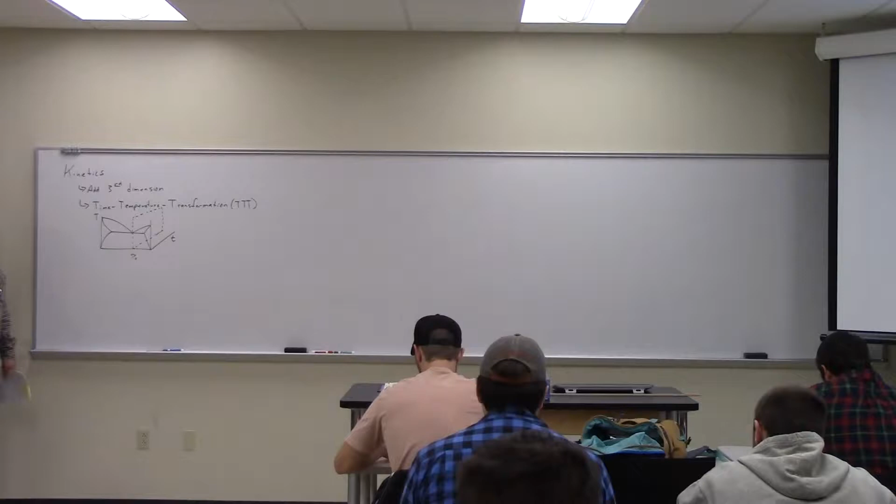Okay, you with me? So you take a time and a temperature to get a transformation at a specific composition. So what I'm going to do is I'm essentially going to take a slice like that through the diagram and show what happens as a function of time. Does that make sense? In reality, what I'm actually going to do, if you want to apply time, is actually in this direction, because the front face that we've been looking at is the infinite time position. So time really—t equals 0 is back here. You follow me?

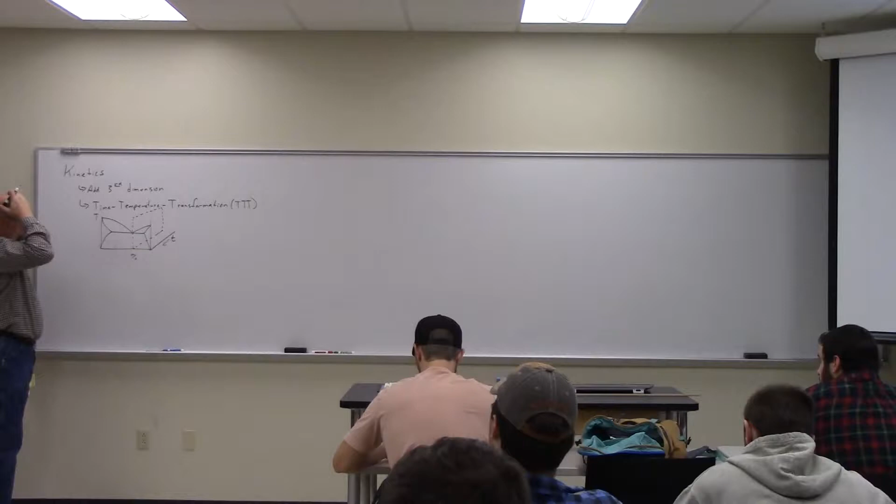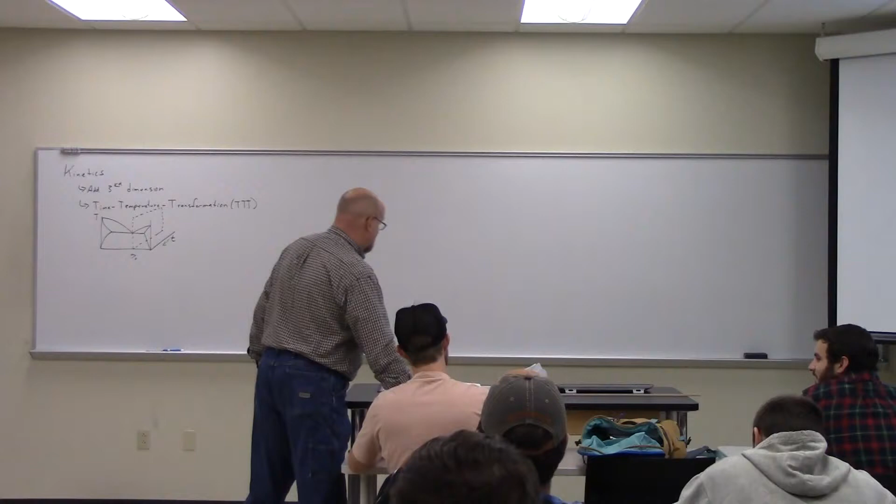Okay, so—God, I think I smell that. It smells like pizza dough or something. I don't know. You're not supposed to test chemicals by smelling them—interesting. Come on, all right. You're not supposed to test chemicals by smelling them, guys. Oh, no, that was something else. Oh, gosh. Oh, apparently I smell myself. I'm sorry, apparently you smell like pizza dough.

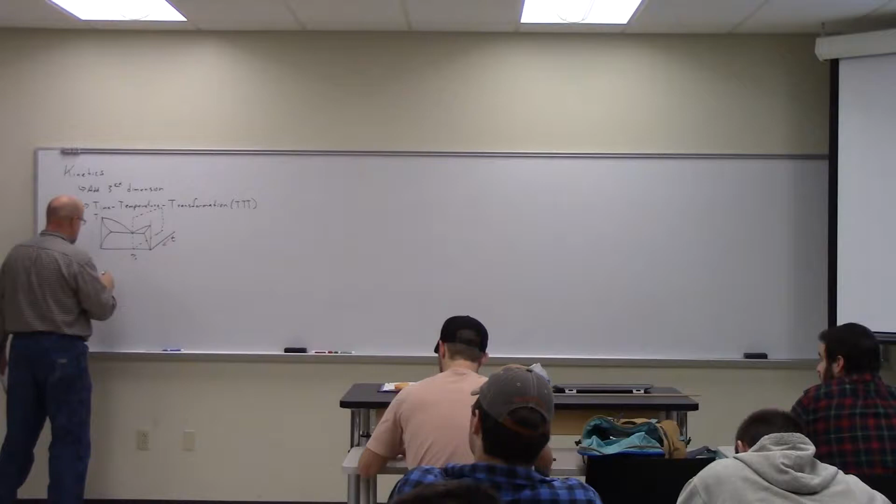Okay, so let's take as an example—and this is the reason we're using this example, because it's probably one of the most important TTT diagrams. I'll do it over here. We're going to take the iron-carbon phase diagram, or actually the Fe3C, the iron-cementite phase diagram, and we're going to use a eutectoid composition.

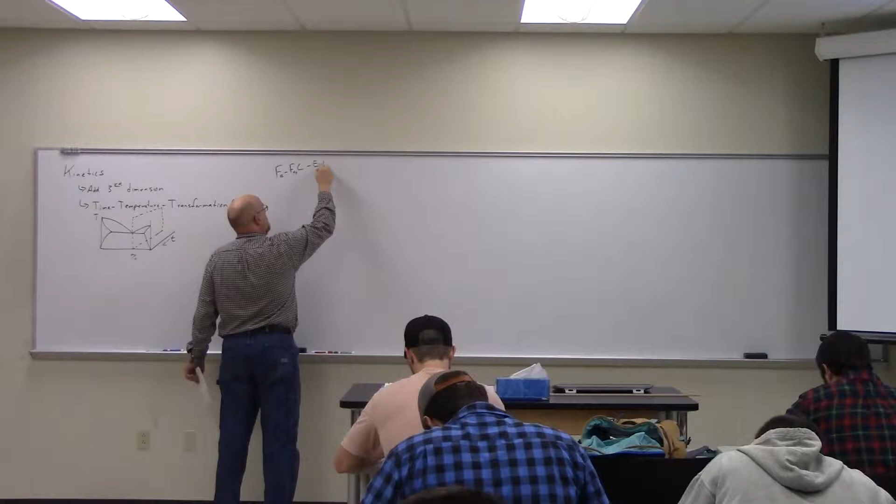Anybody remember what the composition is, what weight percent carbon I'm doing this for? 0.77. Do you have the book in front of you? Did you read that from the book? Yes. Okay, just want to know whether to be impressed or not. I appreciate your honesty.

We're going to take, if you remember, I'm not going to draw the whole thing, but we have the alpha phase over here. This is lead tin? No, that's another one, because iron's got the delta. Okay, so we have alpha here, we have gamma here, and this is 0.77.

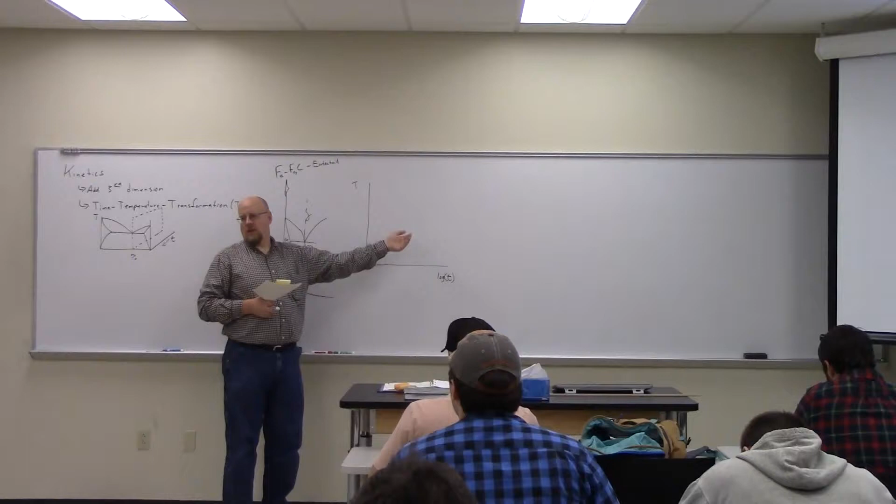So we're taking a slice through that piece, a slice through that thing. And what we end up with is the TTT diagram looks like this. What is it slicing? Through the eutectoid, yes. Temperature versus time, and this is actually versus log time, because we want to make sure we can carry things out to infinity. The best way to do that is to put it on a log scale so we can bring infinity in close.

This temperature here is the eutectoid temperature. So above the eutectoid temperature, it's all gamma. Now, TTT diagrams assume that we are moving down and to the right. Time is increasing and we are cooling. They do not apply for going upward, only for going downward. Is there one that applies to going upward? No. You don't really care because once we heat it, it's just gamma.

So what we get is we get something that looks like this. Whoa, it's a road, it's the highway. This is the 1%. Highway to life, I walk alone. Shut up. Came to a wood, two roads. Those are the 1%, 50%, and 100% transformation lines.

Because below the eutectoid temperature, it's supposed to be all alpha and Fe3C. What's the structure that forms when it goes through here? What does it look like, microstructure? It's like lamella, or lamellar. It's a lamellar structure, right, most commonly that's what forms. So it's going to form a lamellar structure, but if you go fast enough, it stays as gamma.

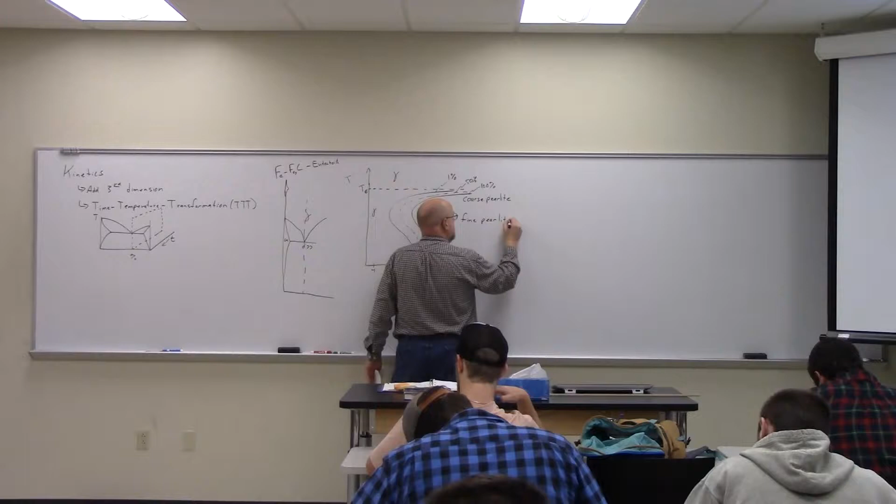So coarse pearlite, TE is the eutectoid temperature. Coarse pearlite just means that it's a lamellar structure. Pearlite is specifically reserved for steel, for the lamellar structure of steel. So coarse pearlite is that you're cooling it slow enough that it forms thick layers.

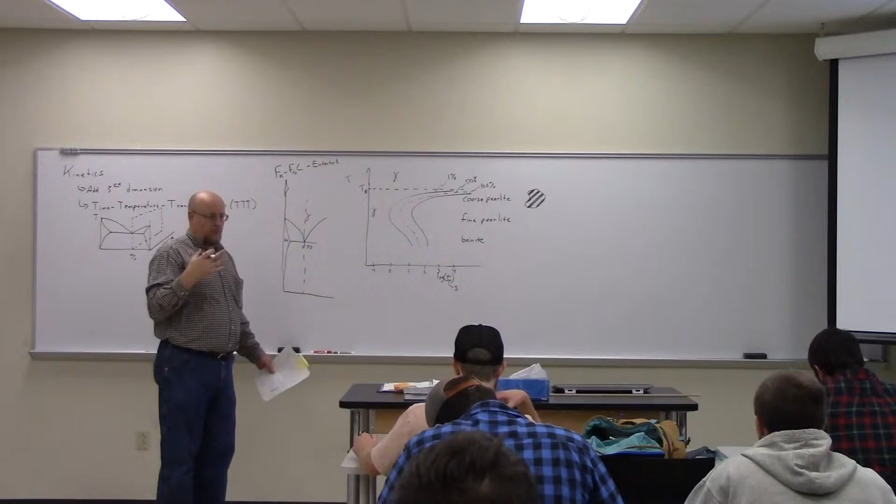It is not nicely laid out in parallel paths. If you go fast enough, it can't form these nice uniform structures, and so it forms these randomly oriented layers.

So is bainite based on the speed at which you cool it, or the temperature at which you're starting? Because that's how you have them written there, like they are where you get them.

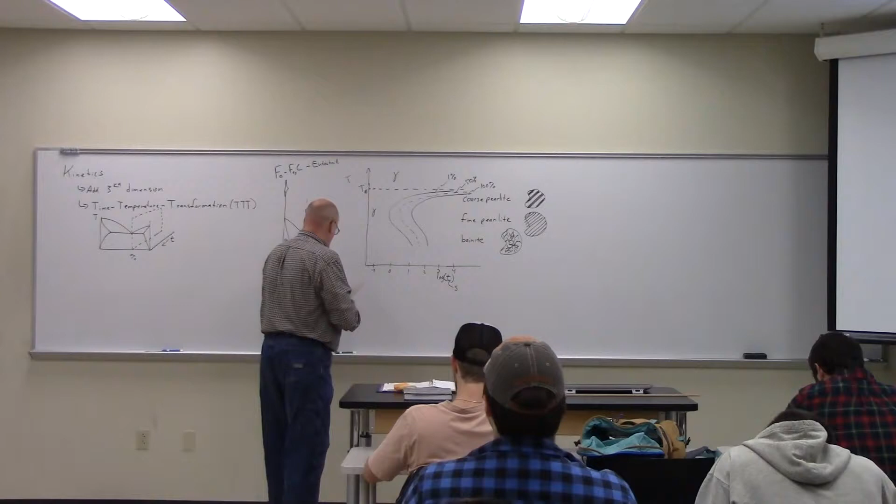So the way I use this is that I quench things. I start out with stuff up here. It doesn't matter, T equals 0, therefore infinitely far to the left, right? Because the log of 0 is infinitely negative.

When I cross this boundary, the clock starts when I cross this boundary. So if I could come down and do this, and then cool it down to room temperature, that says that at this point in time, at 1 second, I begin forming fine pearlite, and over here at about 10 seconds I finish forming fine pearlite. I go from 0% transformation to 100% transformation.

Where's the 10 seconds? Right there, right, 10 to the 1 is 10. Okay, I didn't see that, it's kind of a long scale. So do you understand?

Do you follow that? So there's not necessarily a set path that you take through this. You use whatever you need to get there. So you can structure the thing the way you want to, to your ability to follow that path. Some paths might not be possible.

Where are each of those pearlite and bainite categories? Like where do they correspond? So right now it's fine pearlite. If I'd cooled it down to this temperature and left it for 1,000 seconds, I would form coarse pearlite.

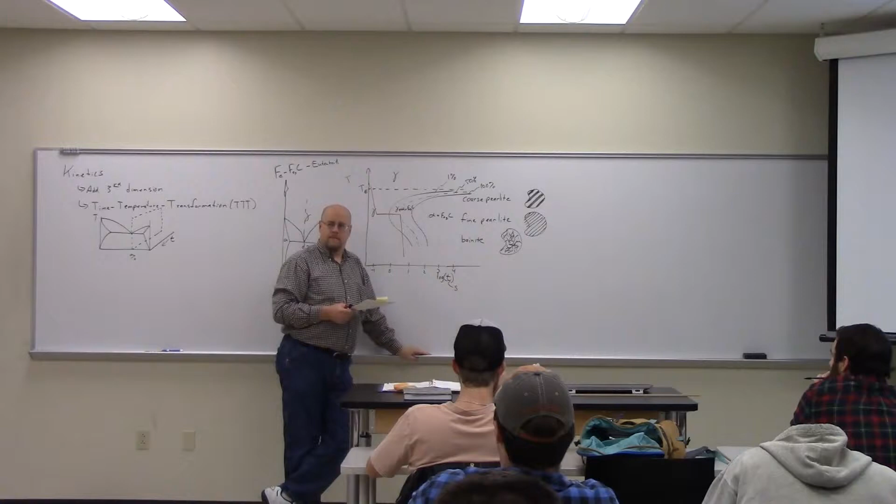But there's no clear delineation between where one starts and the other ends? No, because this is going to be a gradation, right? Just thinner and thinner as we get down here. And as it gets thinner and thinner, eventually it gets to the point where they're not continuous anymore and they're breaking up into random directions.

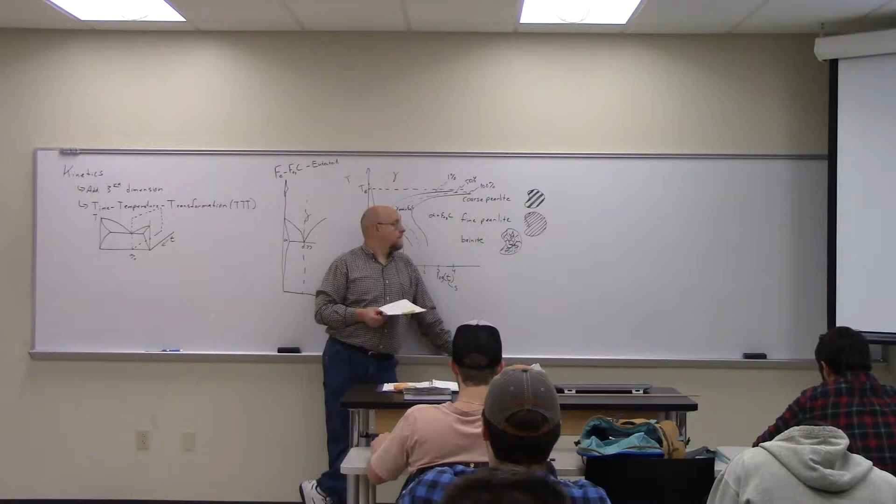Okay, so what are alpha and gamma? Like, I thought we were talking about... Alpha iron, right here — alpha iron and gamma iron. Okay, so is alpha not just on the left side there, but also in...

Right, but this region down here is a mixture — it's a two-phase mixture of alpha plus Fe3C, which is the right-hand side. Just like this section over here is a mixture of, you know, alpha tin, or alpha lead rather, and this was beta tin, and everything in here is a mixture of alpha plus beta, a physical mixture.

Right, but it also changes. Even if you stay at the eutectoid point, as you go in you get into alpha and gamma and combinations and stuff — is that what you're saying? No, I'm saying this is the infinite point.

So you notice if this goes all the way out to infinity, these lines all approach the eutectoid. Above the eutectoid temperature it's gamma. Below the eutectoid temperature it's alpha plus Fe3C, or some kind of pearlite, coarse pearlite. At infinity, time equals infinity, so I'm doing slow cooling — I have a single transition that happens when I cross that temperature.

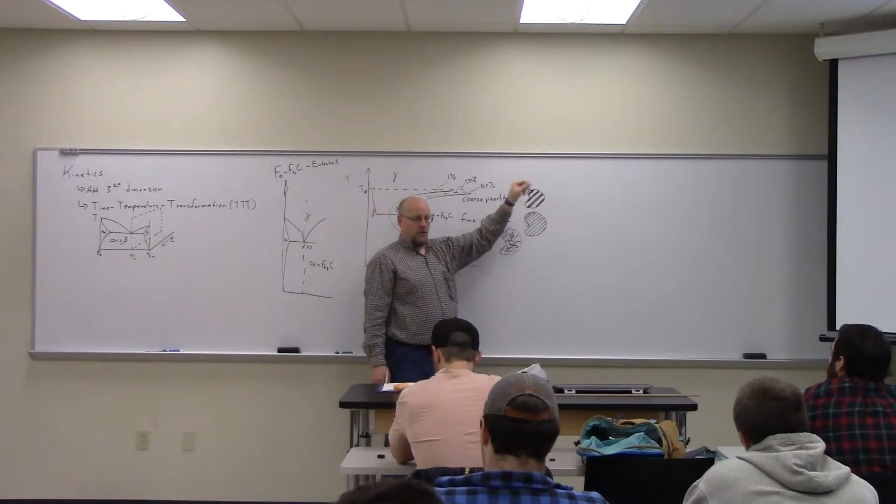Does that make sense to everybody? Because all of these asymptotically approach the eutectoid temperature. This is only what happens in the very rapid cooling section, which is far away in time from this. I'm basically looking at this plane from the left-hand side — T equals 0 on the far side, this is T equals infinity.

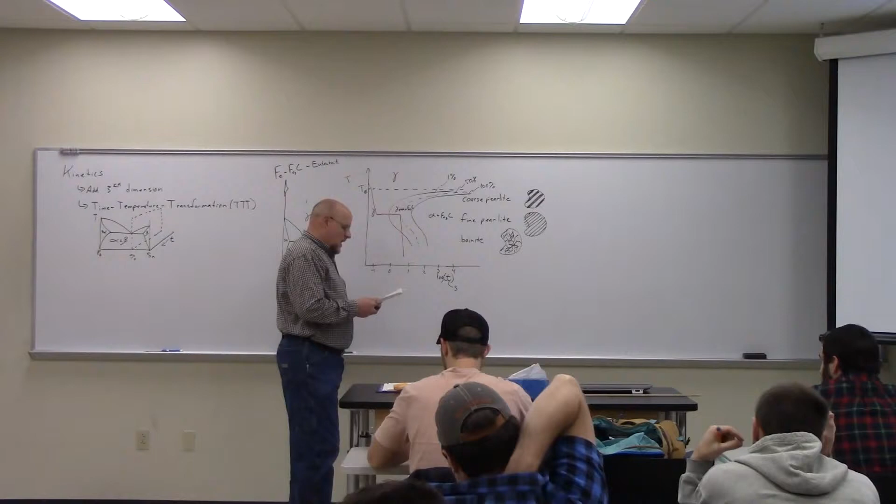This assumes the path I've drawn here has an instantaneous quench down to this temperature, then I leave it at that temperature for this period of time, then instantaneously quench it down. That's how the diagram is derived. It assumes I'm moving only downward and to the right—no angles, no curvy lines.

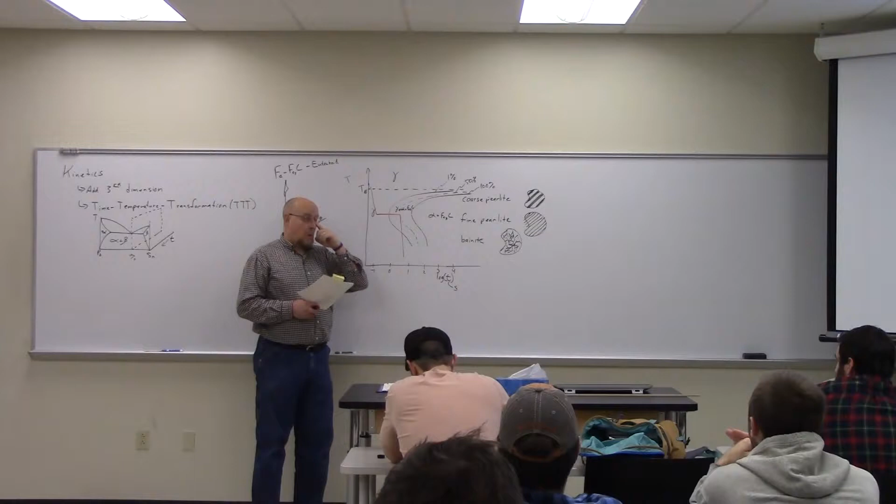Okay, but technically they are curved lines, because we're talking a log scale, right? The red lines, I mean a log scale. Right, but instantaneous is still instantaneous, so downward and to the right still works even on the log scale.

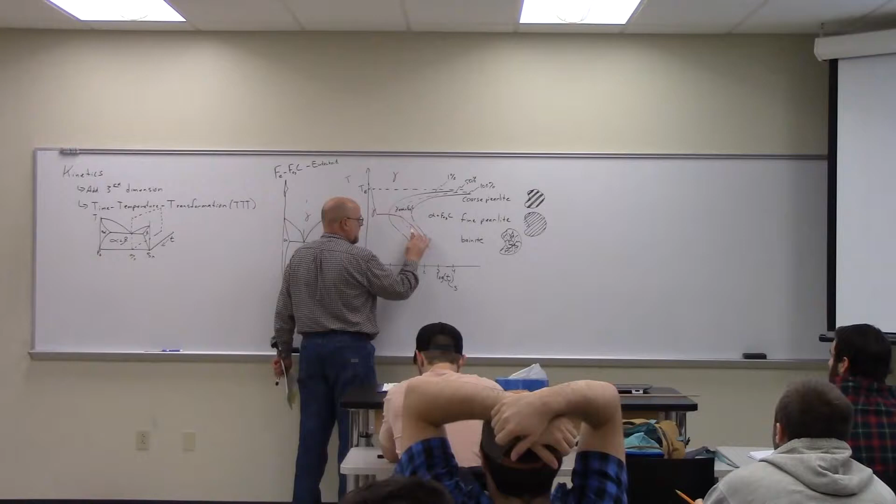There's no straight lines. So we can make the approximation that even if my curve actually looks something like this, we'd essentially approximate that, well, we got 50% fine pearlite. If we went like this, I'd say we have 50% fine pearlite, and maybe you have to estimate, right?

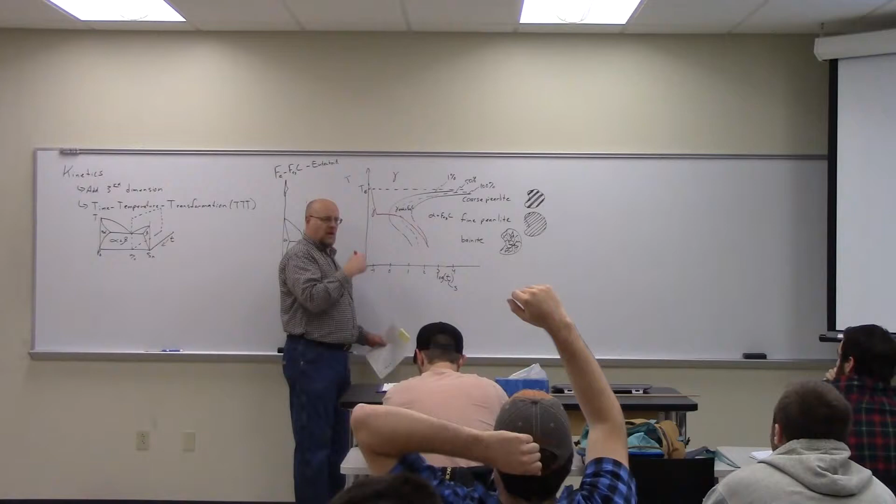You don't really have a good way of knowing how much of it is bainite versus how much of it is pearlite. So that's why you want to go down and across, so that you can actually understand what's happening to your material.

Does that percentage thing come all the way down to the bottom, the x-axis? I told you, as I just said a minute ago, Josiah asked the same question. I'll get to the bottom in a minute. Okay, silly goose, okay.

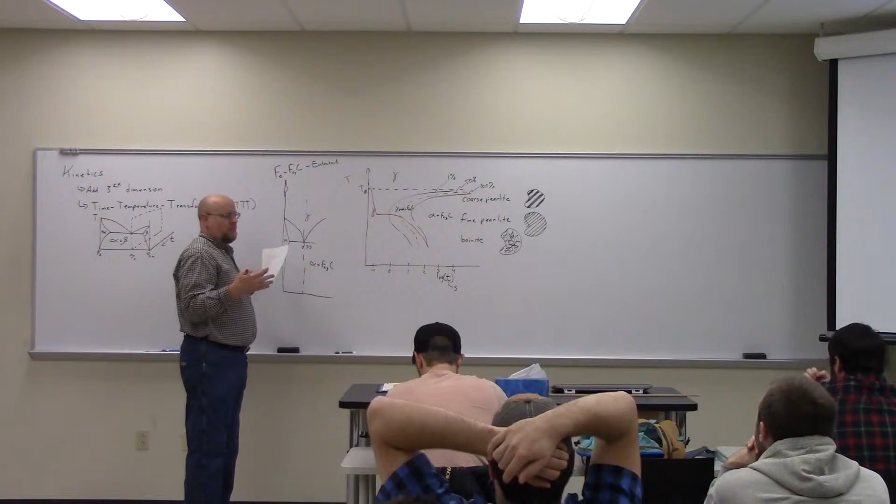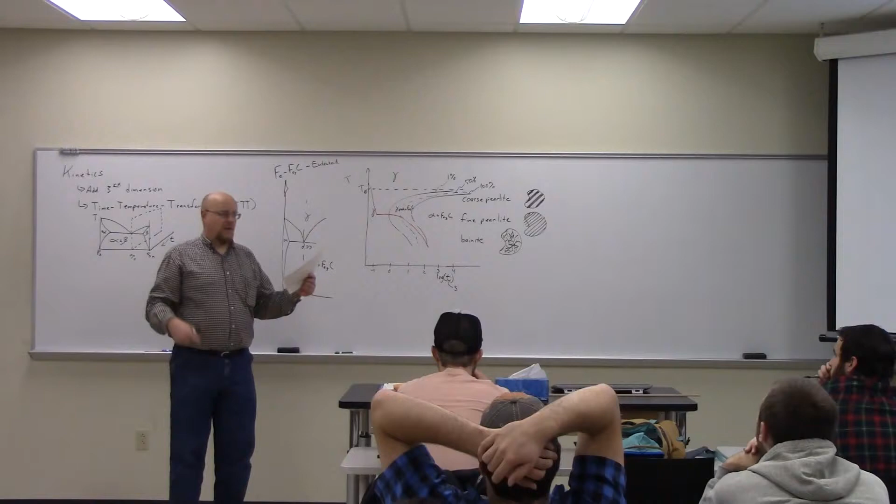Now the thing is, all of these phase transformations are based on a diffusion process. You have to diffuse a second phase out of a first phase. So even when the composition stays the same, I have to diffuse an alpha out of a gamma. So alpha will form at the grain boundaries.

Remember we talked about this with the microstructure problems before—it starts forming at the grain boundaries, the trifold intersections of the grain boundaries. So if I take some gamma that has grain boundaries and then cool it, the alpha will begin to form at the intersections of the grain boundaries, and the alpha crystals will grow while the gamma crystals shrink. That's the way the process works.

So it's a diffusion-driven process, yes? Generically, when do we start to see grains starting to form? Around what temperature? Well, as soon as it's, from a liquid, as soon as it solidifies, you start seeing grains form.

So when the film starts to form on top, if it's cooling, is that just at room temperature? Right, so it's cooling to room temperature, grains are forming on top.

So if you ever lick your ice cream spoon and then put it back on your ice cream, you'll actually see ice crystals begin to form on your ice cream spoon. It kind of forms dendritically, like little trees—a long stem, and then a stem coming off here and a stem coming off here. You ever do that? It's funny when you say it that way, but yeah, I get it. So that's when, as soon as it starts to solidify, you see the crystals form.

All right, so these are primarily driven by diffusion. We've got to diffuse the atoms that are trapped in the gamma out to the edges in order for them to transform into alpha. It's a diffusion-driven process.

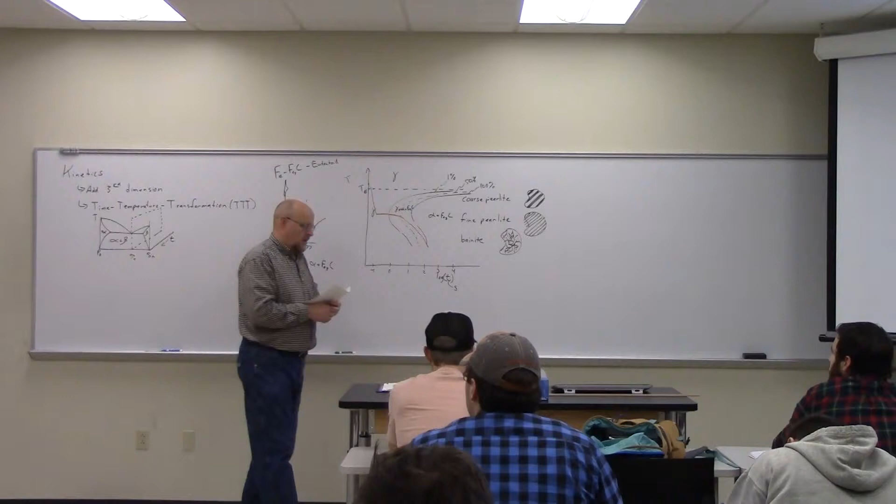So there are two steps. There's nucleation—that is, we have to start the grain somewhere, like I was talking about with the boiling water last time. You have to have some place for the reaction to start. And then you have growth—that is, once you have a seed, you start building on that seed.

So let's look at nucleation first. We have local diffusion that governs all these atoms having to come together, diffuse through whatever's there to begin with, to nucleate a particle. So they have to coalesce. As I said, things like high energy regions, like in the grain boundaries or on the surface—as Colin pointed out, it's going to happen on the surface. You have higher energy on the surface. So there are two driving factors.

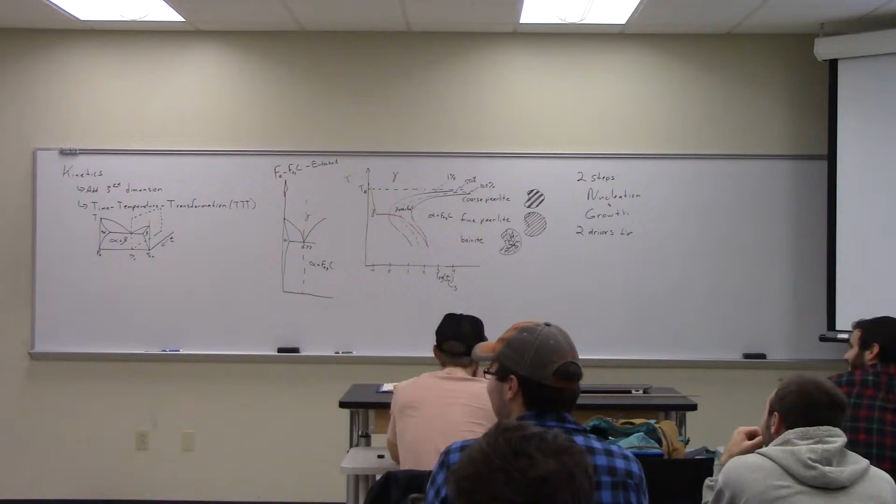Are you sure those are drivers and not risks?

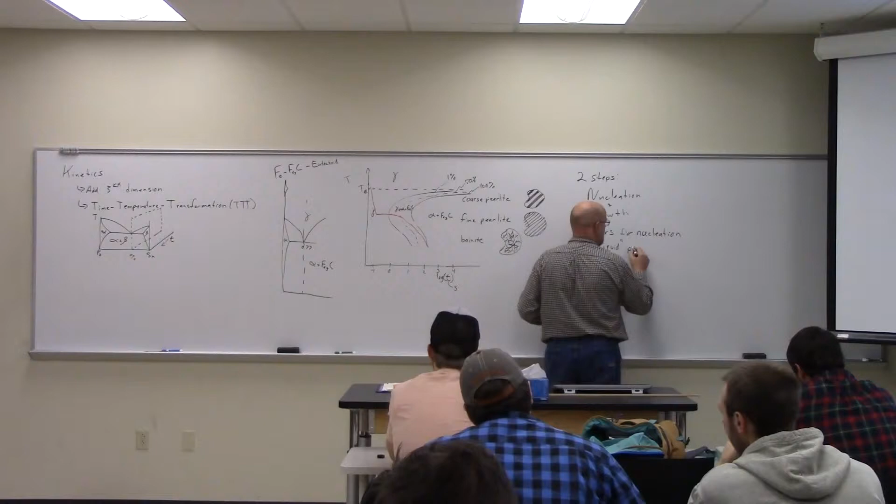Okay, two drivers for nucleation. The first is what I'll call the liquid phase instability, even though it's not necessarily a liquid for the eutectoid. Right, just like I was talking about with the boiling water. You superheat the water, it gets above 100 degrees C, it's unstable. It doesn't want to be water, it wants to be water vapor. The higher the temperature you go, the more instability you get.

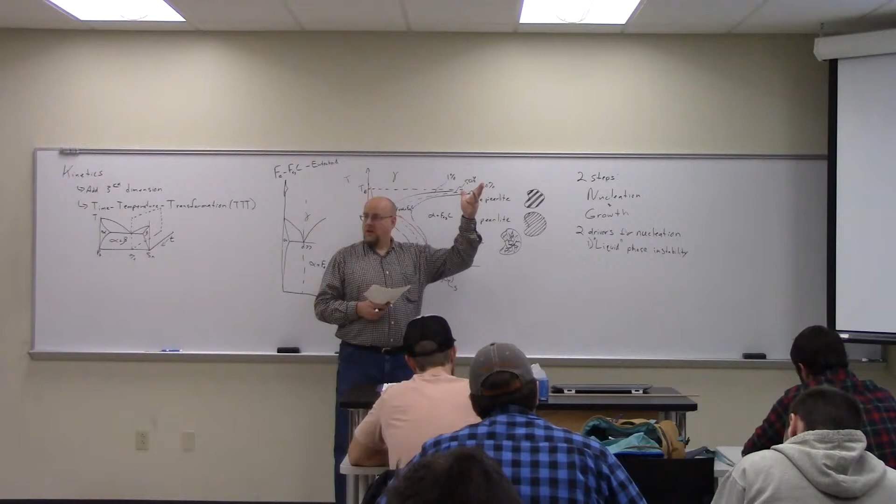Right? The second driver is diffusion, to form nuclei.

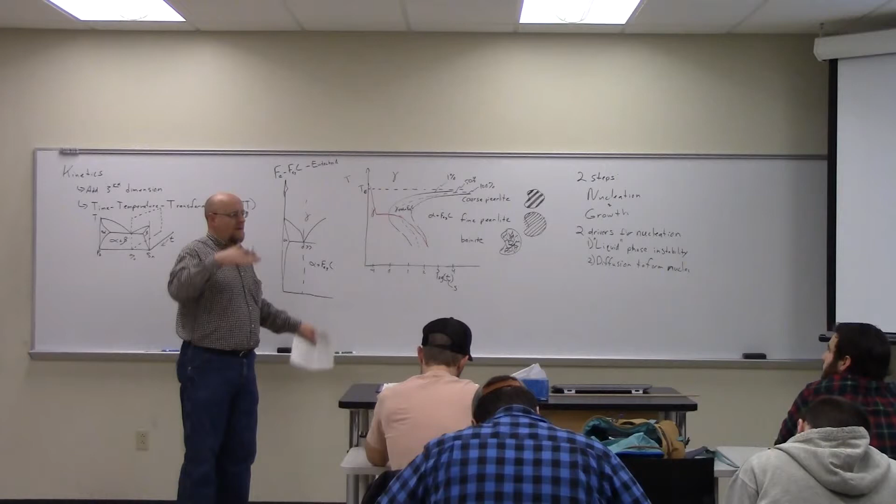So in this case, liquid phase instability is bigger the colder you get. The colder the liquid becomes, or in this case it could be the gamma, right? But it's gamma phase instability. The colder it gets, the more unstable that material is. Does that make sense?

So if I were to plot it as a function of temperature, and plot the rate at which it happens, seconds to the -1, at high temperature, let's put T sub E in here, for instance. At the eutectoid temperature, there's no instability. At T sub E, there's zero instability, so there's zero rate.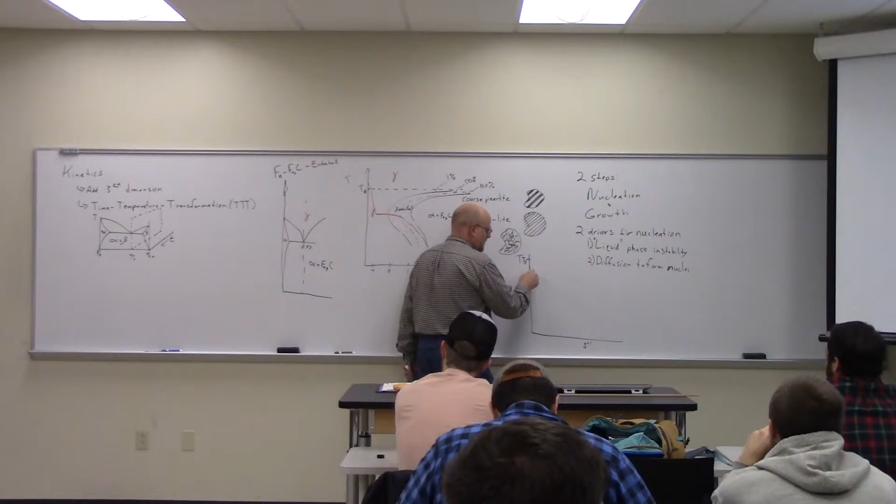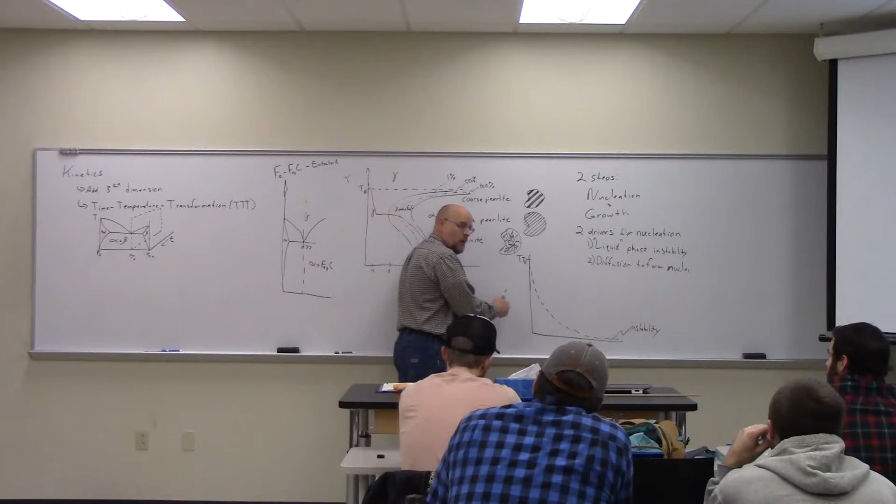But as I get colder and colder, the instability increases. So this is instability. I get more and more instability the colder the thing gets, the further it gets from the eutectoid. As I drop the temperature, I get more instability, therefore a higher rate, or higher likelihood, of the liquid phase wanting to transform into the solid phase, or the gamma phase wanting to transform into the alpha. The lower the temperature, the more unstable it is. Does that make sense?

Well, why aren't we plotting rate on the y and temperature on the x? Simplifying, temperature on the y and rate on the x? Deal with this: because over here we plot temperature on the y, so we're going to continue to plot temperature on the y.

Diffusion, on the other hand, does not occur very well at low temperatures, right? We've shown the Arrhenius plots. Remember talking about the Arrhenius relationships? The higher the temperature, the greater the diffusion rate. So diffusion does something like that.

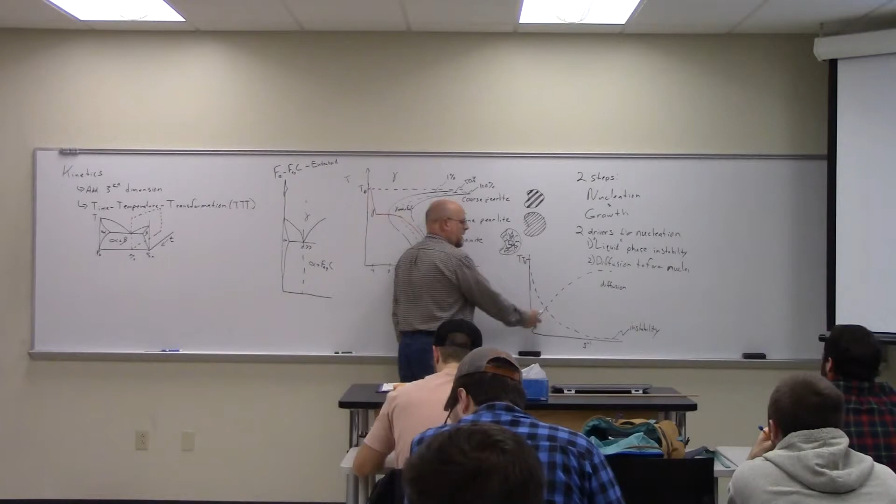So at very high temperatures, actually let me compress that a little bit so I can get this right. At very high temperatures I get lots of diffusion, but I have very little instability because it's very close to where it wants to be a liquid anyway, or wants to be a gamma anyway. At low temperatures it's very unstable, but I have very little diffusion to drive the process.

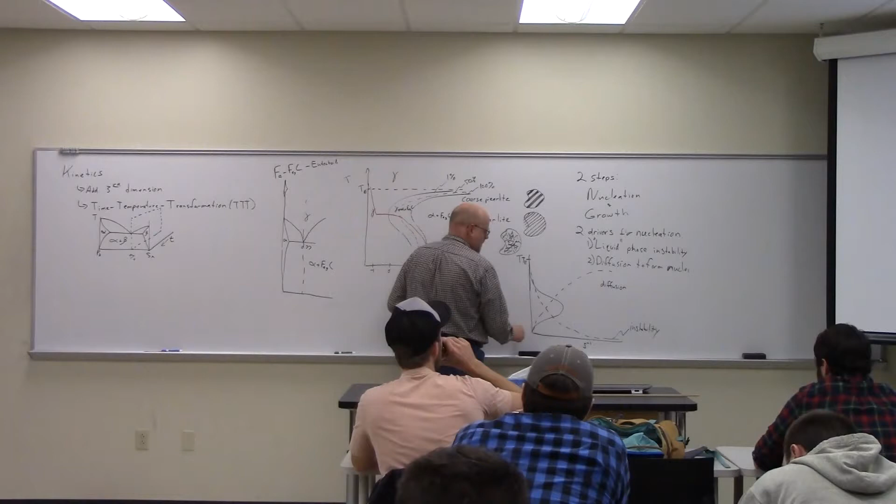So what I end up with is the product of these two, which is the nucleation rate, which looks something like this. N dot, the nucleation rate. Does that make sense? Yes? Okay. See, it's nice when the back row bobbles their heads, and I know I'm all right.

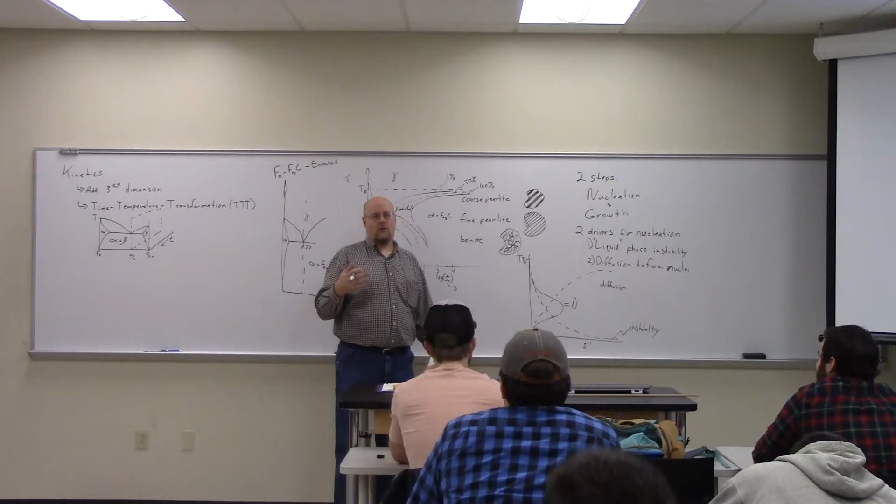Actually, you're more likely to doze off when you're sitting. Anyway, that's the nucleation rate. Now, that only covers nucleation. What about growth? What's going to drive growth? Temperature, yeah, but how? What kind of mechanism do you think growth is going to occur through?

Some sort of differential equation. Isn't that the common answer for all engineering problems? Is there a differential equation? Well, it turns out...

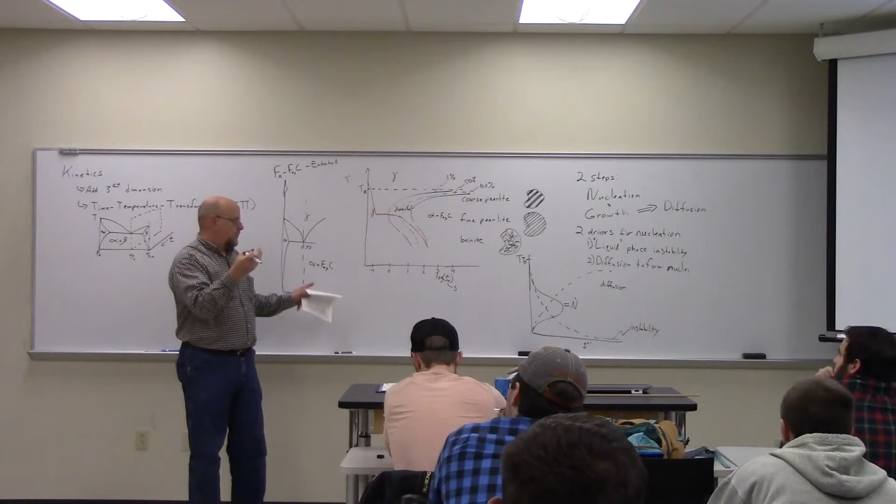Growth is really only diffusion. There's not an instability that drives growth. The only thing that drives growth, once I have a crystal, the only thing that stops it from growing, because it's the stable thing to be in that matrix, right? The alpha is the stable element. There's no instability driving alpha. Once I have an alpha, the only thing keeping me from getting more alpha is diffusing stuff to get there—diffusing other material to that surface so it can form more alpha. So it's just diffusion.

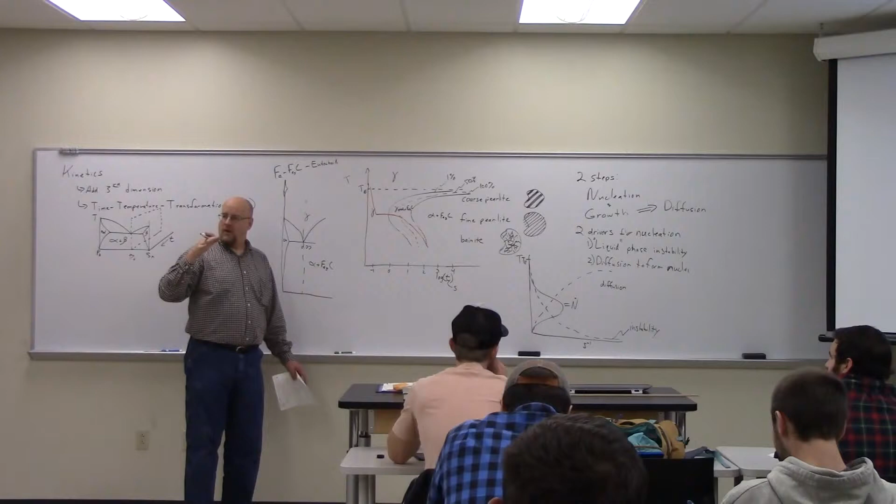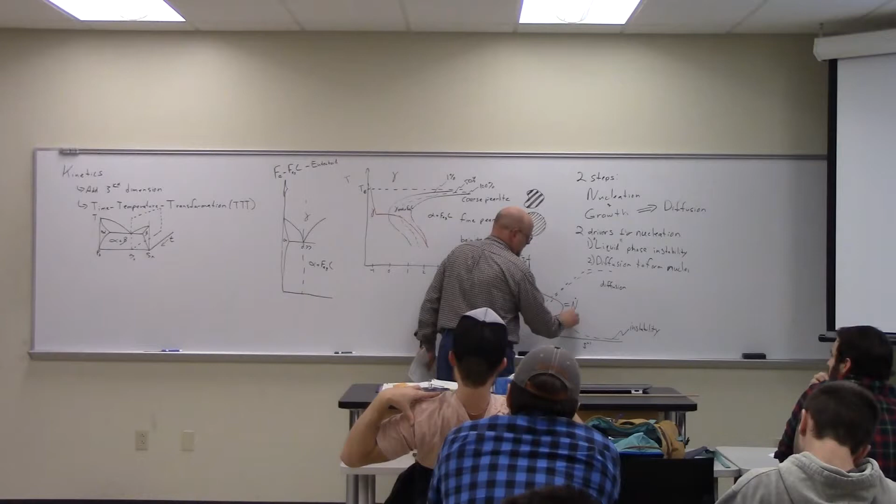So essentially I end up adding another diffusion curve to that other one—a different one, not the same diffusion curve. So what I end up with is a total thing that looks like this, something like that, where this is nucleation and growth rates. The overall transformation rate, right there in the red.

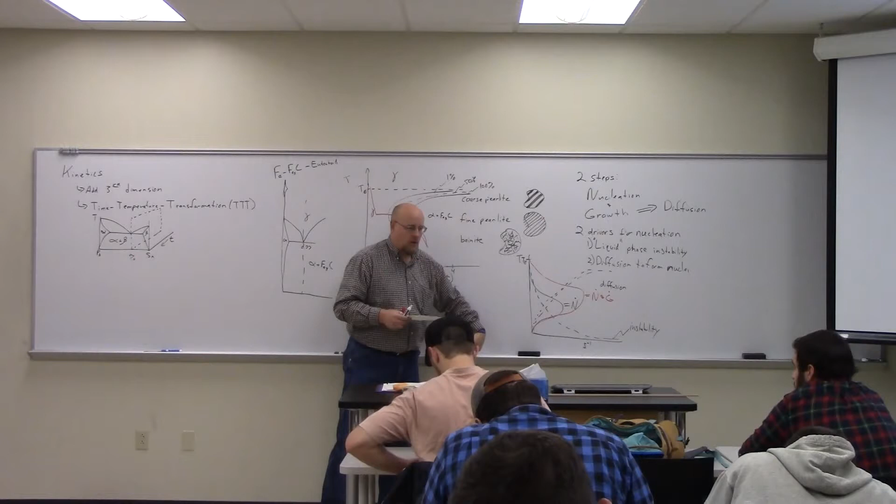But I don't really want to plot it as a function of rate. I want to plot it as a function of time. So I have to invert my horizontal axis. And when I invert my horizontal axis, those things become these things. So that hump right there, when I invert my axis to time, becomes this.

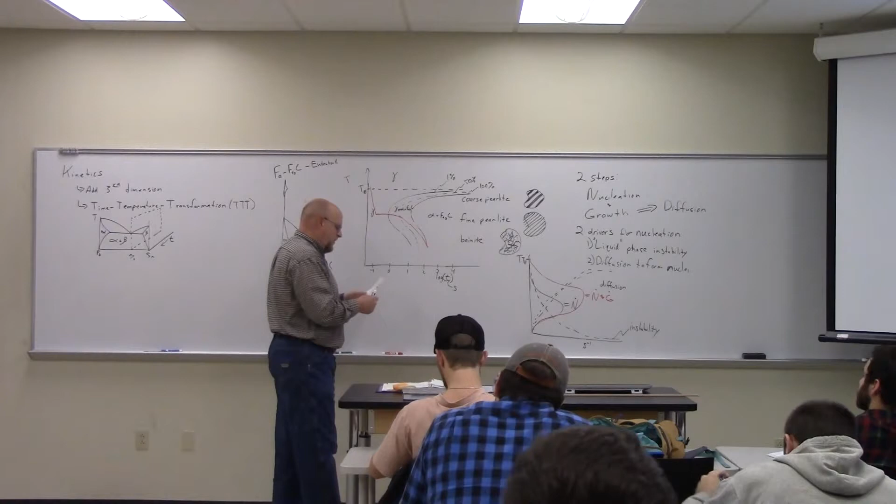Does that make sense? So it's still all driven by the nucleation, or primarily by the diffusion. Diffusion really governs, has the biggest impact. But there's still the fact that you have little instability at the top, and that little instability drives this out here. Okay, that's mostly diffusion-related behavior that acts like this. There are a few that are non-diffusion behaviors.

Anyway, so there are some non-diffusional phase transformations.

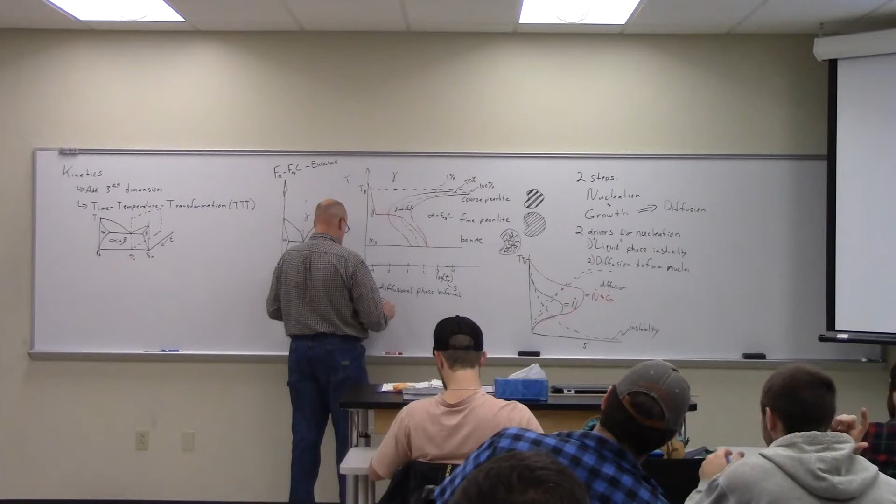The one we care about here is martensite. I think that's what MS is - martensite start. So we have the martensite start. It's a sudden reorientation of the crystals.

Basically, kind of like twinning. Remember twinning? There was like a ding, right? And you heard it because it was. So here's the same kind of idea.

We have these gamma crystals, and we slam them down cold enough, so cold that we create such tremendous instability that instead of having to diffuse atoms around to grow crystals of alpha and Fe3C, we spontaneously and suddenly get all of the atoms to rearrange themselves into a different crystal structure, which in this case for steel is martensite.

So what you get in martensite in steel is a body-centered tetragonal structure. So we're going from an FCC gamma to a body-centered tetragonal, BCT structure, in martensite.

So if you think back to it, FCC - is that BCT there? BCT, body-centered tetragonal. All right, so FCC, we've got an atom on every corner, an atom on every face. Everybody see that?

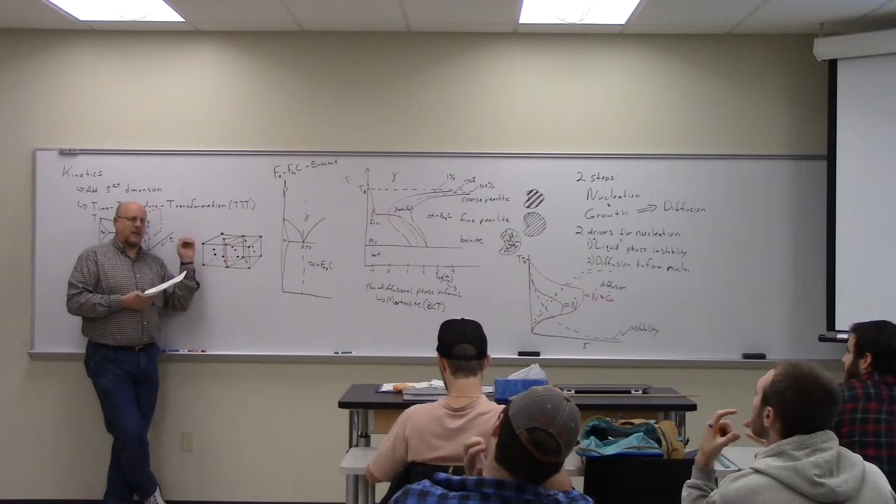How a body-centered tetragonal could come from this - so basically what that means is FCC is like a body-centered tetragonal, but with the special condition that the A of the body-centered tetragonal is equal to the C of the body-centered tetragonal divided by the square root of 2. If that C changes ever so slightly, it's no longer FCC, it's just body-centered tetragonal. Okay?

So that's how it can happen rapidly. There's just enough cooling pressure to get it to shrink, and then you have a new crystal structure.

So apparently mercury, when it's frozen, and you have a little bar of frozen mercury, if you bend it, it crackles like this. You also have to be really cold because - yeah, I don't think we'll be doing that. I saw it on YouTube. We could look it up. Or not, everything on YouTube is true.

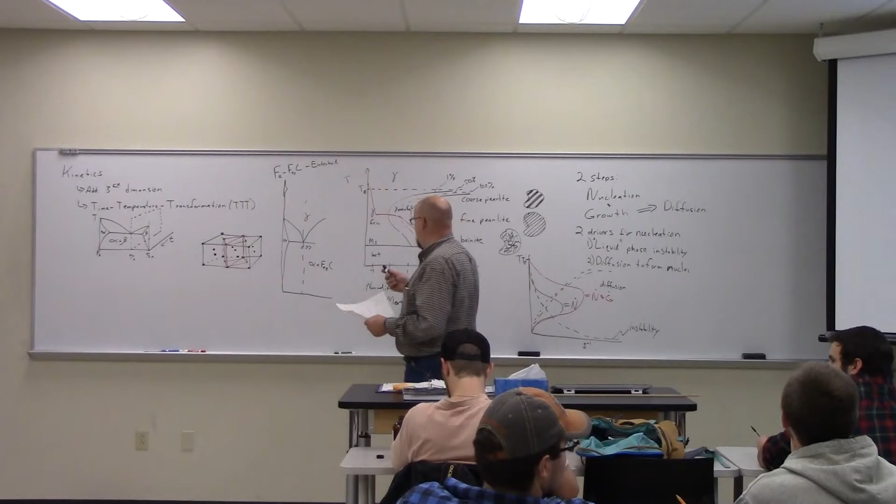Okay, so we end up with this martensite region. Now, martensite also goes through a series of transformations, just like the pearlite formation. So you have an MS, an M50, which is 50% transformation, an M90, and then, if you go far enough, an M final. But this one is minus 46 degrees C.

You go 46 below to get a completely transformed martensite. So it's not likely to happen. The start is 215 degrees C, this is 160, that's 130 degrees C, so still above the boiling point of water. You get 90% above the boiling point of water. The last 10% requires you to go from 130 down to minus 46.

So basically, we're going to be dealing with things in the M90 state. We're working with this material in like the M90 state.

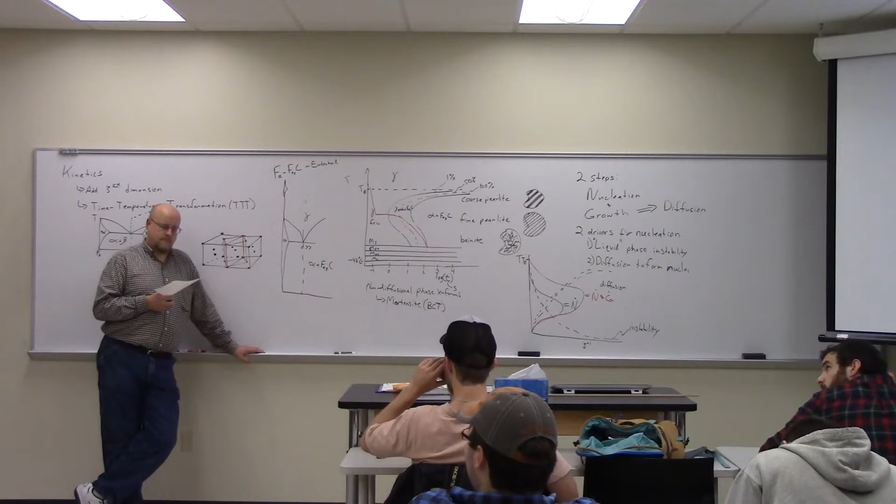Yes, at best, if you have martensite transformation, you're going to be working with something that's 90 to 95% martensite. However, what's really cool is once you get down into here, the gamma is locked in. You don't get the gamma changing - if I get down to here and let it go for a long time, the gamma doesn't change to bainite or anything. The gamma is locked in as gamma.

So once I get down into here, I don't have to worry about the time anymore. I just got to get myself down into there so that I can lock it, get some martensite to form to lock in the rest of the austenite. And then I can gradually cool it to get the rest of the transformation to occur.

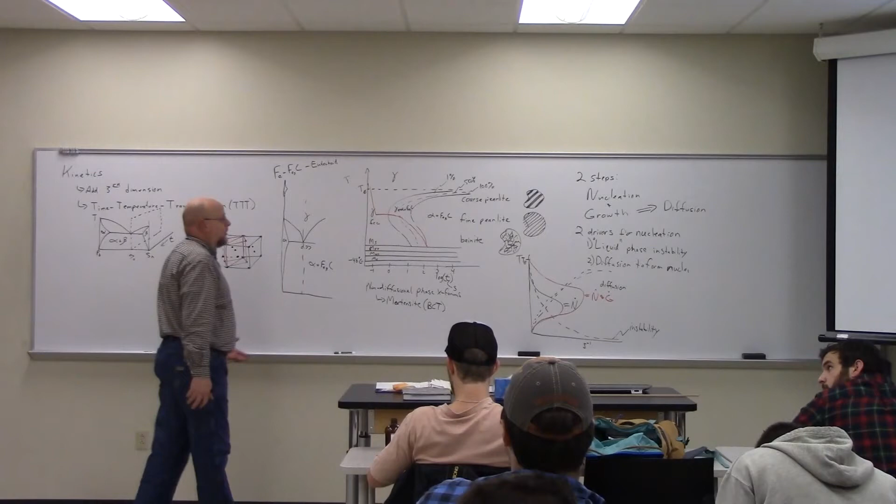So really all that we need to know - I'm just trying to figure out where this graph really comes into play in life. We want to know when we quench something, is it coarse pearlite, what's it quenching to? We want to know what kind of microstructure we have. Because it turns out, the further I go down this list, the harder the material is. It's going to be a lot easier for dislocation to propagate through a big open space like this than to propagate through this.

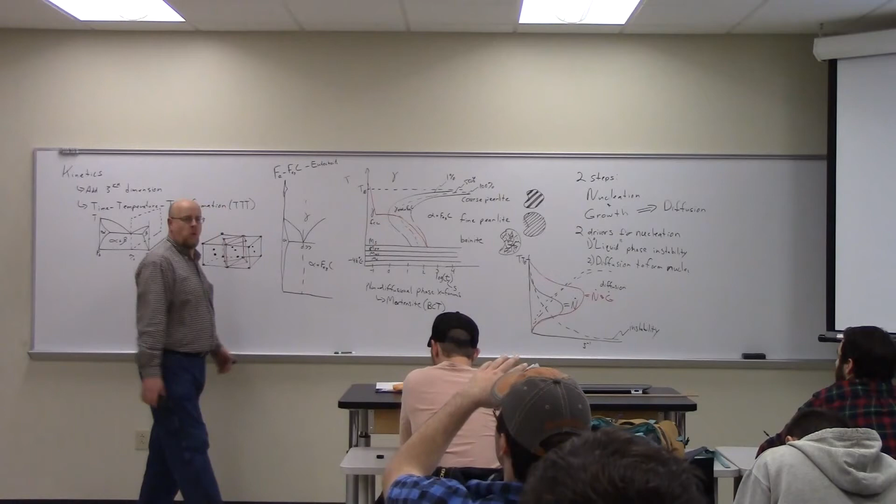So the coarse pearlite - we get over the coarse pearlite and then we just let it slowly cool after that, it's going to be fairly soft. Pearlite, right? There's no driving force to form anything else because it's perfectly at equilibrium with alpha and Fe3C. No, it won't become martensite.

Once it's formed alpha plus Fe3C, there's no more martensitic transformation. Martensitic transformation can only go from gamma to martensite, because alpha is a BCC material. It cannot go from alpha or Fe3C to martensite - those lines really shouldn't go past that. No, it does, because this only covers down and to the right.

Now, I've already gone 100% transformation - once I've gone to that point, I'm done. Once I've crossed the 100% line, I'm done. So you can't go down to the right and then down again. I can, but it's not going to change anything. Once I cross that 100% line, I'm done.

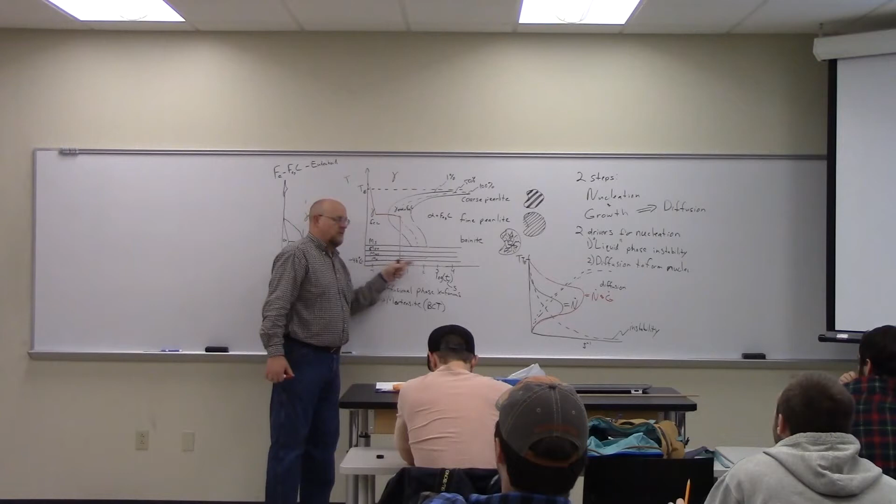If I went down, did this, and then went down from here, and then went over, then I would have something that's 50% fine pearlite and 50% martensite. Even if I went to the 90% line - once you pass that 100% line, you're done. Once you pass the 50% line, you're done with that 50%, right? Does that make sense?

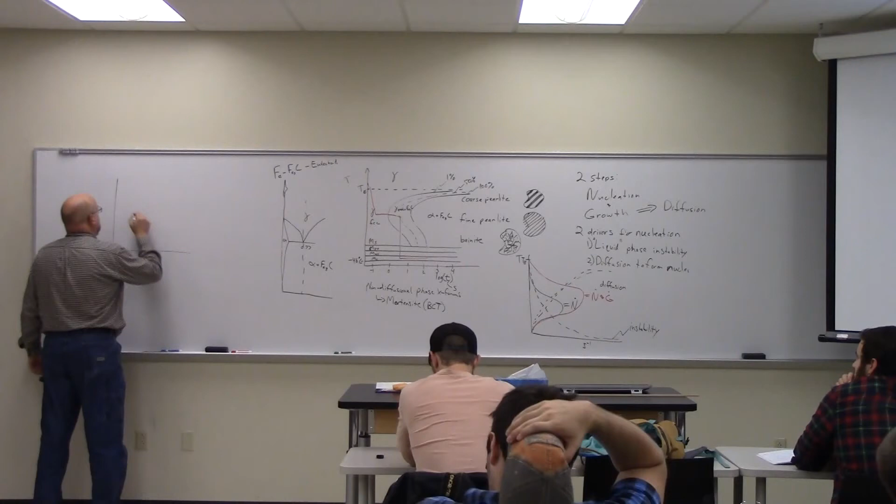Ish, okay. And this is true for the eutectoid composition, but you can also do a similar thing for a hyper or hypo-eutectoid. So this is what the eutectoid composition would look like. But if it's hyper or hypo-eutectoid, depending on where I am...

So if I'm coming down here instead, this is T, call it T sub S - that would be T sub S. There's a similar knee in the curve, even for a hypo or hyper-eutectoid. So here I still have gamma, here I have gamma plus alpha, here I have gamma plus alpha plus Fe3C, here I have just alpha plus Fe3C.

That make sense to everybody? And as we go into that gamma plus alpha section, it would be a different concentration of gamma plus alpha, getting more and more alpha as we go that way? No, the amount of alpha - this is just a percent transformation. And generally we only draw the top, where you start the transformation. So as I go across here to the right, I'm converting more of my gamma to alpha, but I'm never going to get any more alpha than I'm supposed to have in my system.

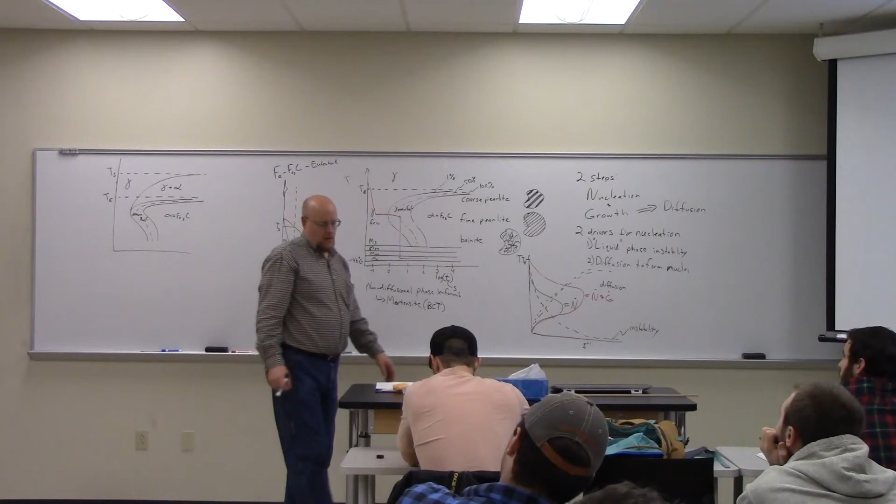Yeah, let's do this one. No, let's not do that one. We'll do that one next. Let's do this one. You can give us a gift. No. Okay, you guys want to figure that out on your own? No, that's true. Well then.

All right, so even though the earlier section we talked about this thing talks about crystal nucleation, as I said, it also applies to solid state transformation. Right, so gamma to alpha. So here we have equation 10.1. I've written out equation 10.1 in the slide.

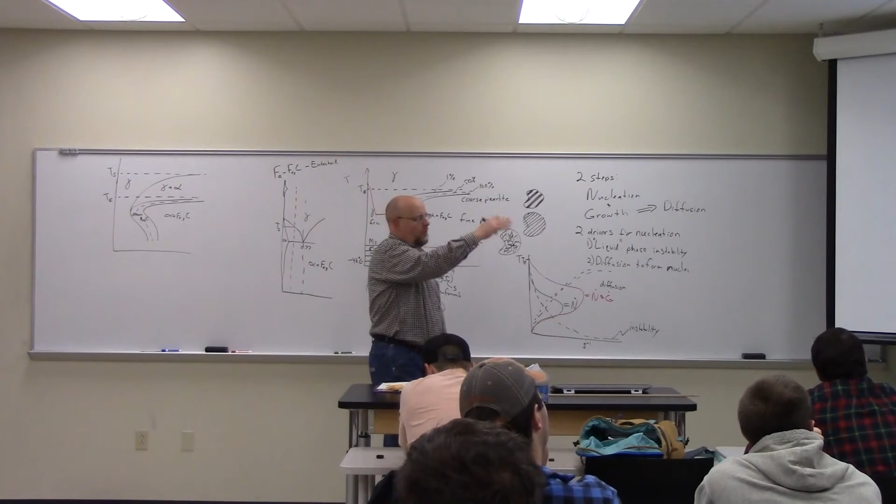It can be used to describe the rate of precipitation upon cooling of a supersaturated phase in a 10 weight percent tin, 90 weight percent lead alloy. All right, so we go back, we're back to the lead tin diagram. Probably should have put the lead tin diagram up there. Hopefully by this point you guys are pretty familiar with this. This is 19, this is 97.5, this is 61.9, and well, the temperatures we're going to have to deal with.

Given precipitation rates of 3.7 times 10 to the third per second, and 1.4 times 10 to the third per second at 20 degrees and 0 degrees. Okay, so the rate at which precipitation occurs.

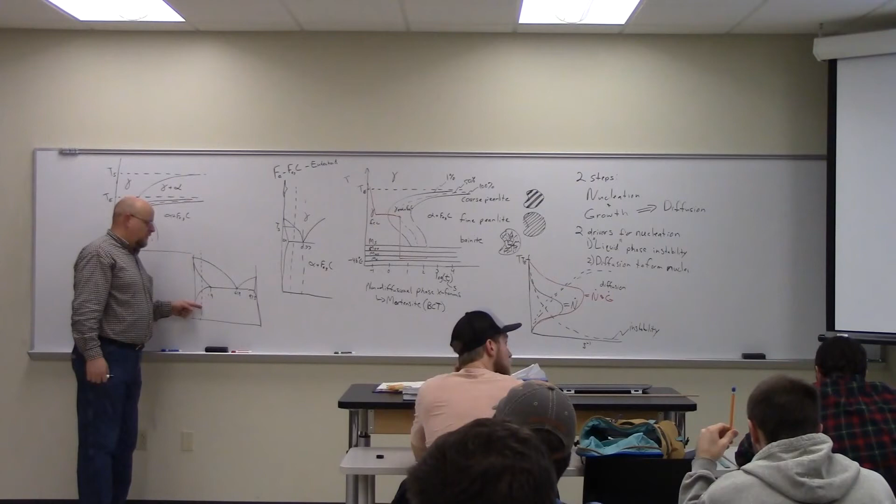Everybody understand that? Okay, so we're at a 10, 10, 90, right? We're doing this. So we're coming down this graph. The graph right here. So we basically take this and we're cooling it down. So we're moving into this two-phase region where the alpha lead is breaking into alpha plus beta.

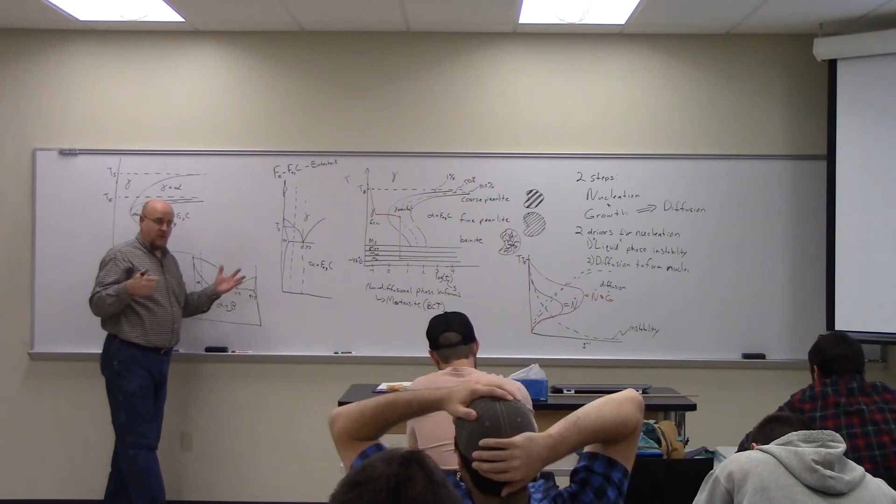And we're precipitating out beta. Right? So it requires that the beta, the tin atoms diffuse together to the grain boundaries, particularly, in order to form the material. So we have precipitation rates of 3.7 times 10 to the third.

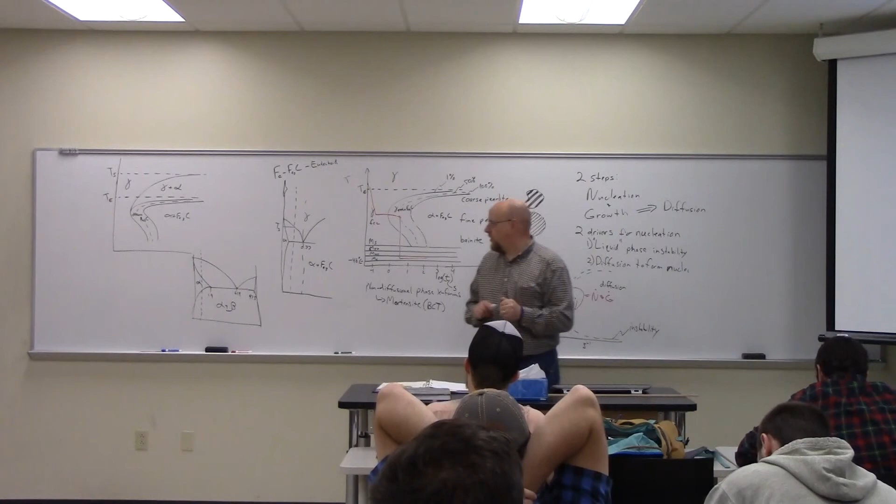So the precipitation rate, the growth, this is the growth rate. Precipitation rate is 3.77 times 10 to the third at T equals 20 degrees C. And the precipitation rate is 1.40 times 10 to the third at T equals 0 degrees C.

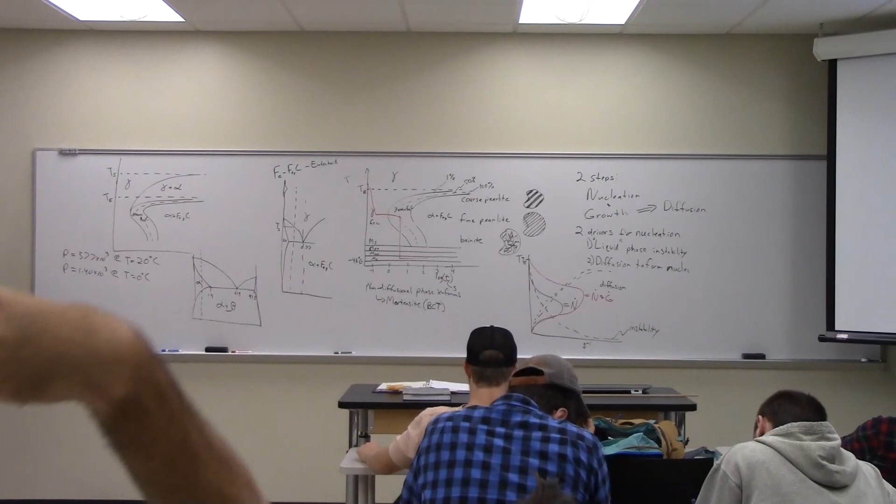Everybody follow that? And they're asking to calculate the activation energy for this process. So what is it they're asking for? In my diagram, in my equation there, what is it they're asking for? Q. They're asking for Q, the energy necessary to cause a precipitation event. So I'm supposed to solve for Q. So how would I solve for Q?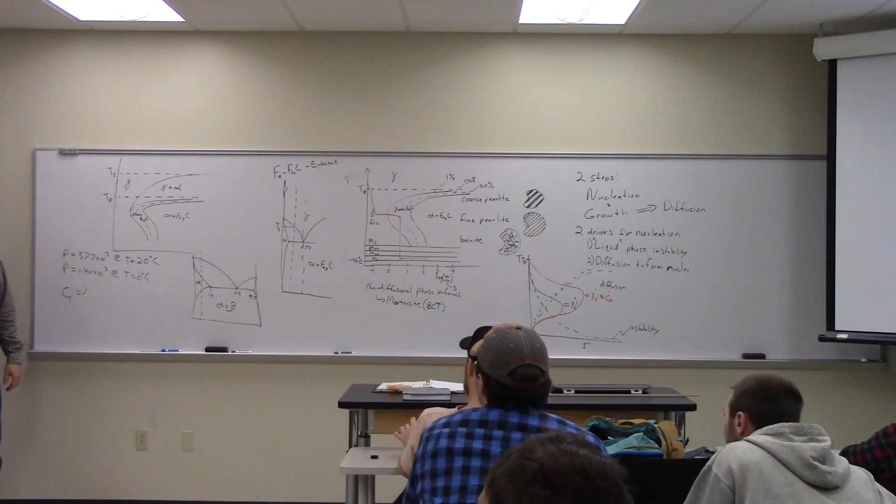What do we do? Take a ratio. Remember? So we have P20 and P0. So what we really want is the ratio of P20 divided by P0 so that the C's cancel out. Right? And that's going to be e to the minus Q over R times T20, which is R times 293, divided by e to the minus Q over R times T0. So P is G?

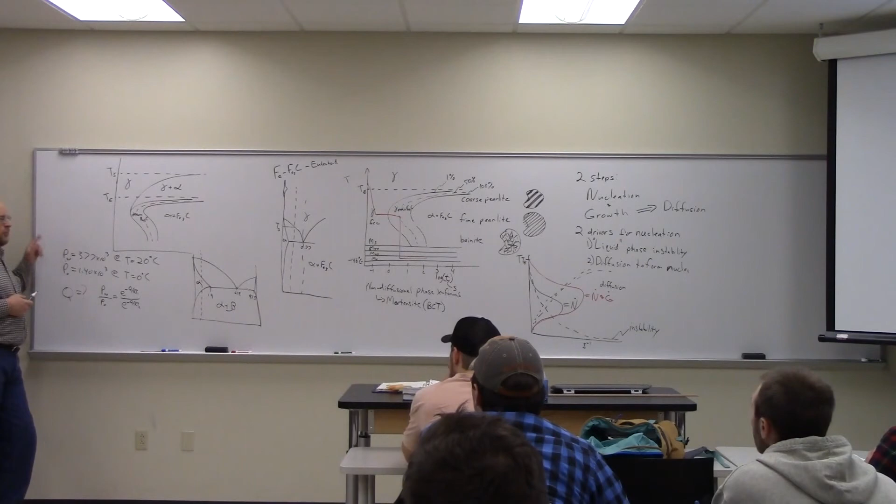P dot is the precipitation rate. That's the equation. It says, although section 10.1 concentrates on crystal nucleation and growth, so that's a growth rate, okay, similar kinetics laws apply to solid state transformations. So growth rate and precipitation rate have similar functions. Basically they're saying they're both Arrhenius behaviors. That makes sense. Okay? Both precipitation and growth are Arrhenius behaviors.

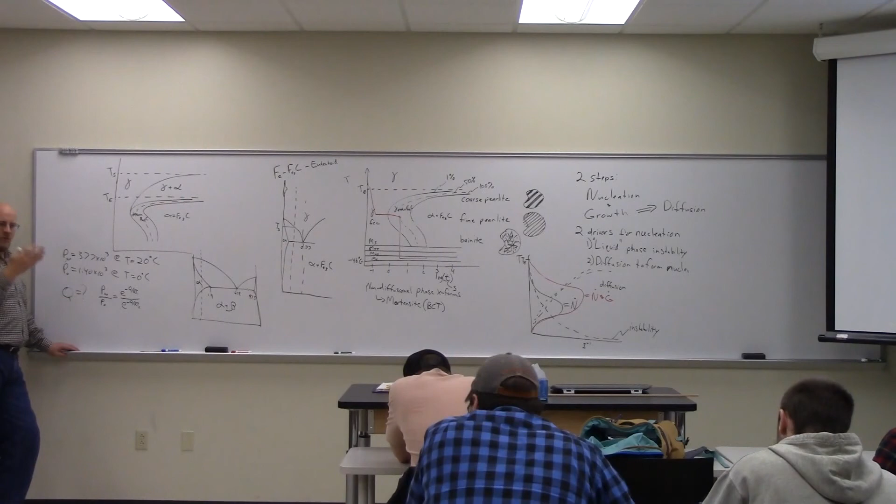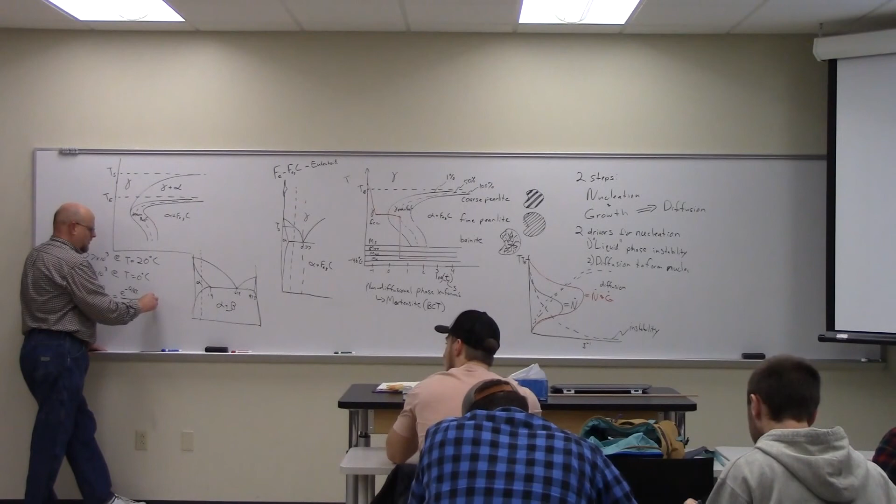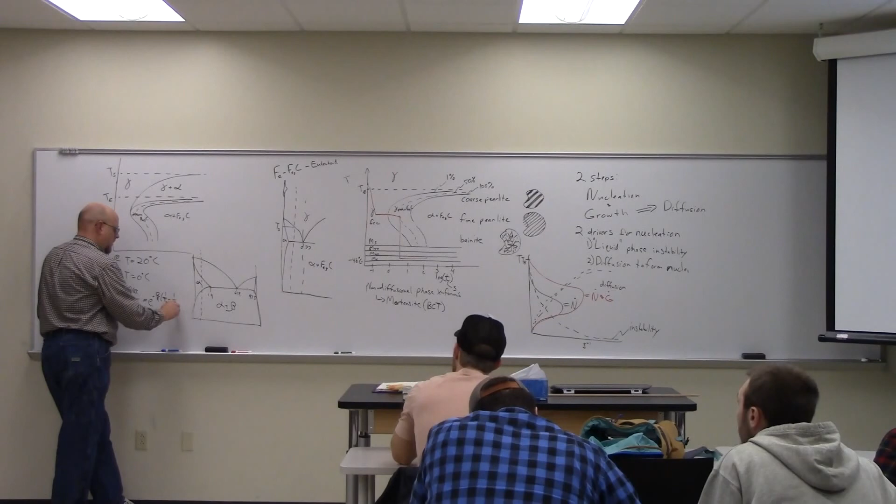So we can take the ratio of those two. Right? So that's e to the minus Q over R times 1 over T2 minus 1 over T1. Right? So we get rid of the C and we can solve for Q because we know R and T.

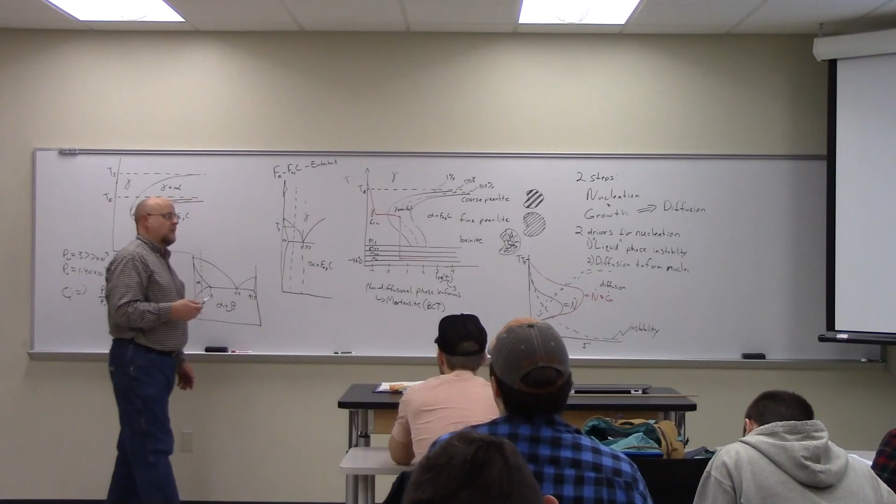And we're out of time, so it's fine, we're not going to get through that. What's R? What do you mean what's R? R is the universal gas constant. Oh, in this case, yeah, it's 8.31. You know, it's R bar from thermodynamics is R here. Good.

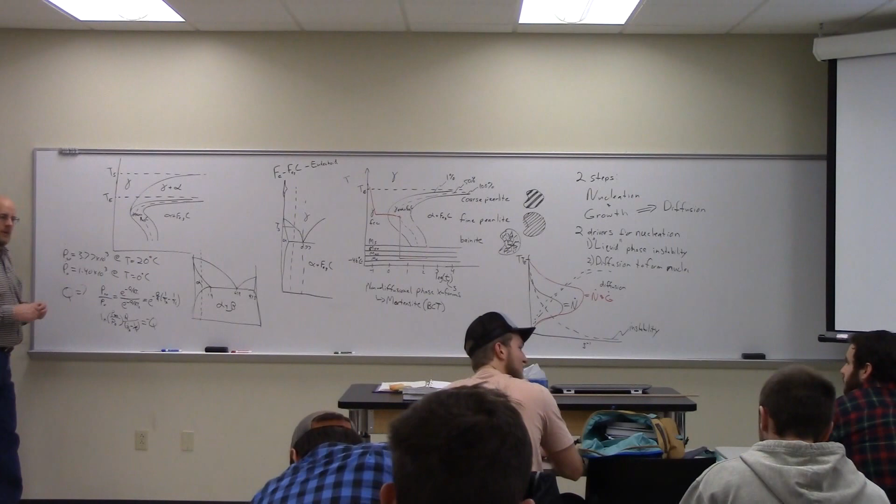R. Okay. So hopefully then you take the log of both sides. So basically we end up with the ln of P20 over P0 times R divided by 1 over T2 minus 1 over T1 is equal to Q. Actually, do the algebra. All right.